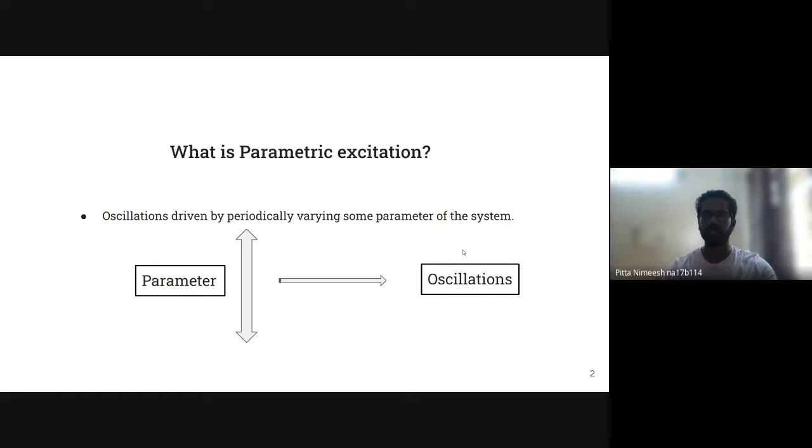So first I'll go over what parametric excitation is briefly. So parametric excitations are oscillations which are driven by periodically varying a parameter of the system. So this is a very non-intuitive kind of phenomena. So I'll give a small example to help you get an intuition.

So everyone must have played on the swings in the childhood and tried doing this without swinging, without putting your feet on the ground. And so you must have wondered how this happens. So this is basically a result of parametric excitation.

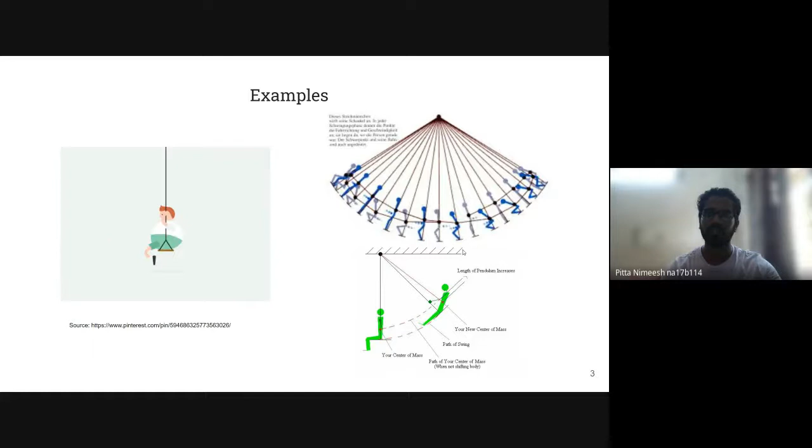So what you're doing here is changing the position of your legs and body such that the center of gravity changes, and your body acts like a pendulum, and changing the position of center of gravity changes the length of the pendulum. Now, doing this continuously produces oscillations. Yeah. So now we'll look at how this happens in ships.

So we all know that the roll natural period of a ship depends on the GM, which is given by this, and one of the parts of this is BM, which is the second area moment of water plane area divided by the underwater volume.

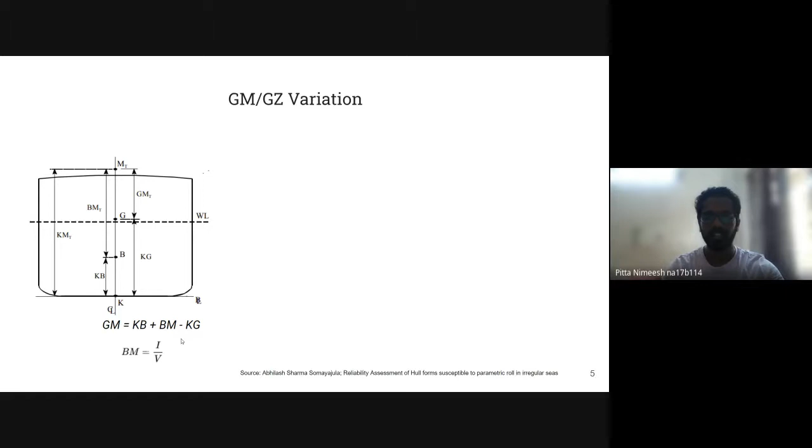Now, when there is a wave passing through the ship, due to the wave, the water plane area and the underwater area changes. Now, when the trough is at the midship, the underwater area is more, and when the crest is at midship, the underwater area is less than what it is at the calm water.

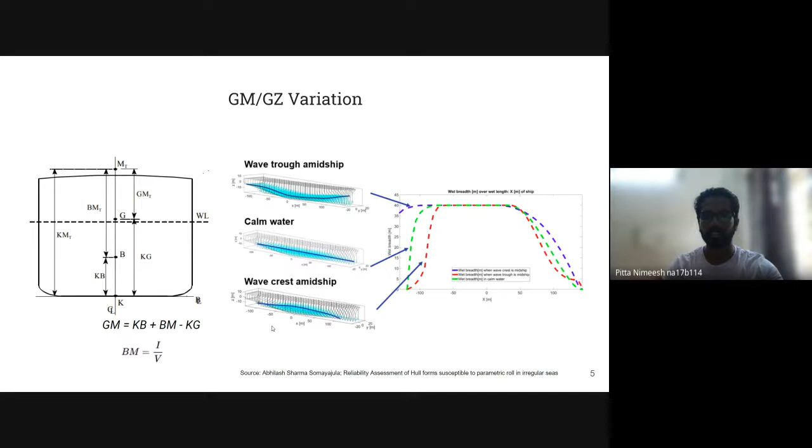Now, this variation in underwater area will cause a change in BM, and this causes a change in GM, which is a variation in our parameter of the system. So this is what causes parametric roll.

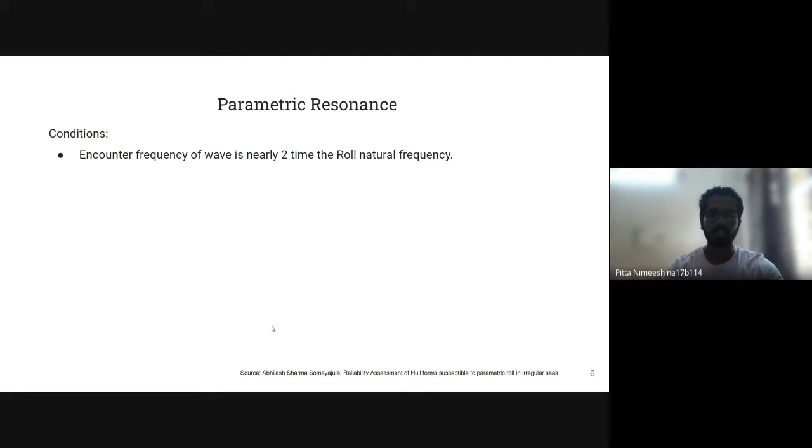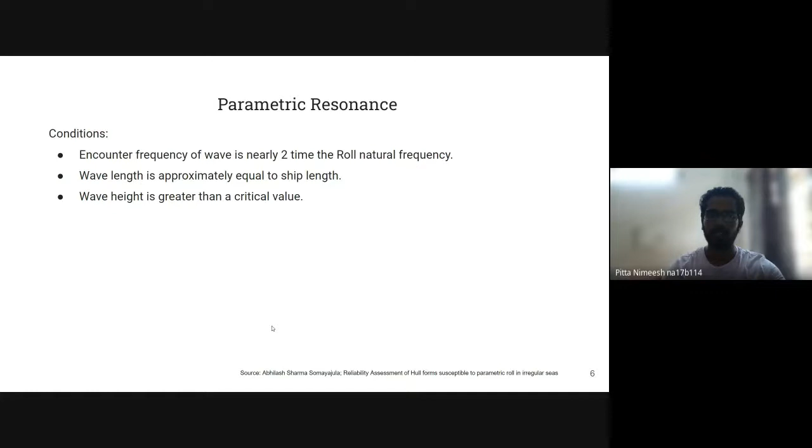Now there are certain conditions which have to be met for this to cause resonance. So these conditions are that the encounter frequency of the wave should be twice the roll natural frequency, the wavelength should be approximately equal to the ship length, and the wave height should be greater than a certain critical value. The roll damping of the hull should be less.

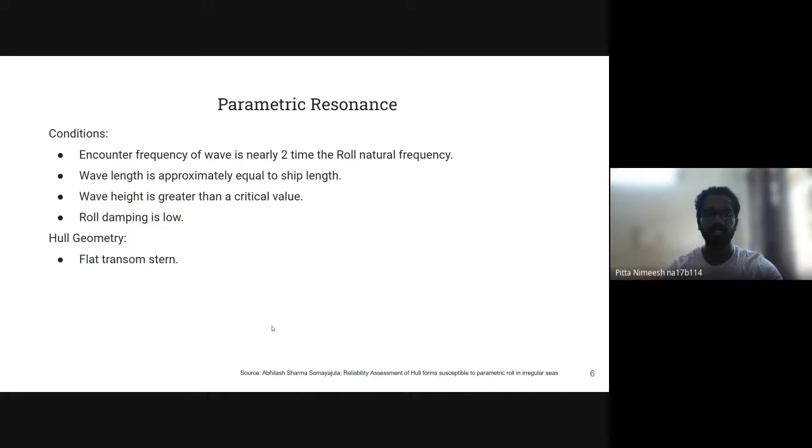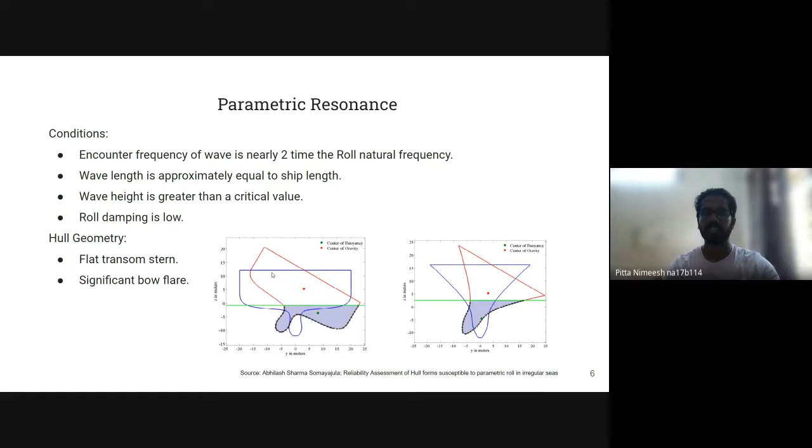So there are certain hull geometries which are more susceptible to this phenomena. So this is a flat transom stern. Here you can see that the hull form is changing very drastically, both at the aft and forward. So this is a hull form of the KCS hull, and due to this drastic change, the underwater area changes, as we've seen in the previous slide. And this is the general cause of parametric resonance in ships.

So any doubts till now? No, you go ahead. We will take the questions at the end.

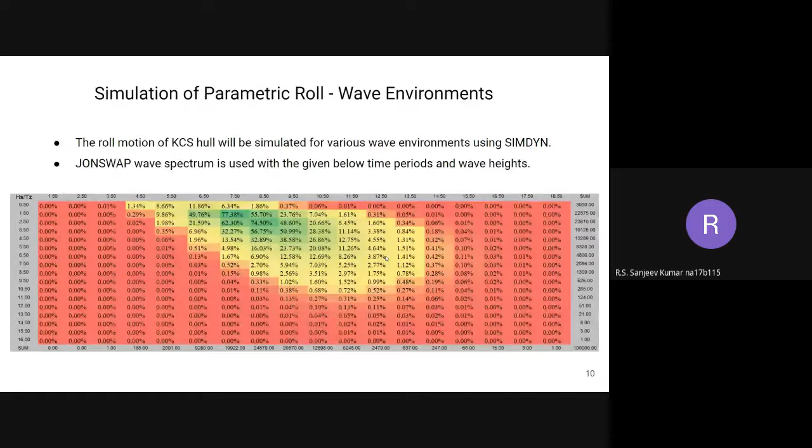I guess the more interesting question is, how did this table come about? Yes, so this is from experimental data that they gathered. So how must this have been constructed? What would be the methodology through which this table came about? So they must have gathered the wave elevation data over a large period of time, and then seen how many times a certain wave with this height and time period occurs.

Yeah. So I think the answer is simply that the corner box you see is about 100,000, maybe 1 lakh. 1 lakh waves were observed, at least, if not more. In 1 lakh waves, they were looking at height measurements of the records. Definitely more than 1 lakh waves must have been observed. And what they're trying to find out is, from each wave record you will have an irregular wave elevation.

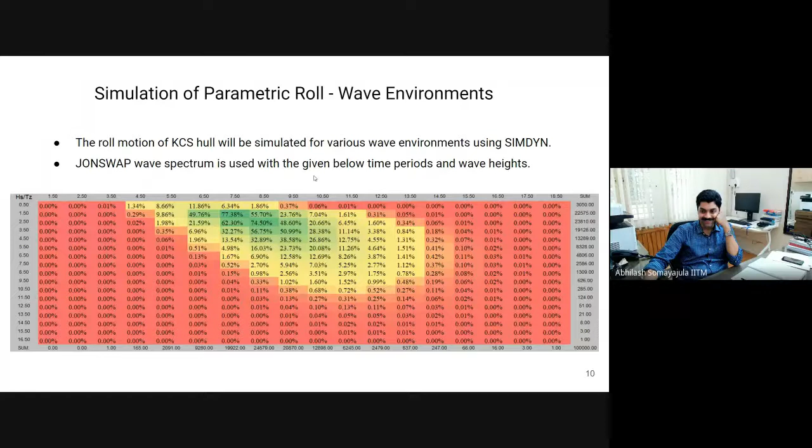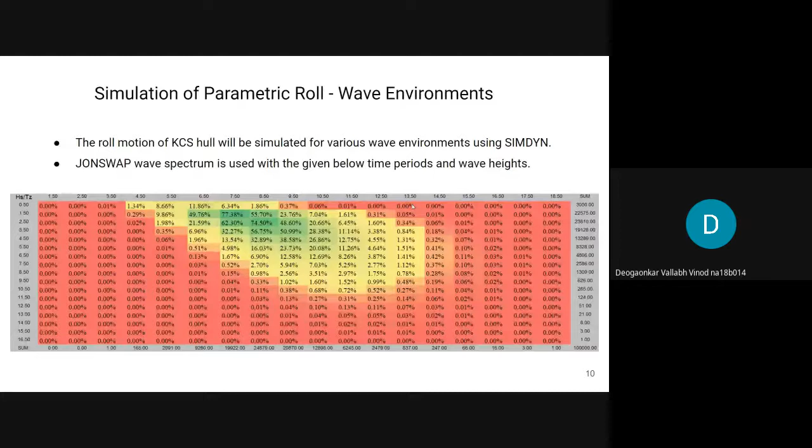Like if we have simulation, then why LSTM and all that? Okay, so basically if you simulate it, it takes a very long time. So right now there was one simulation, right? This itself took me around 1 hour approximately. So if you use an ML model, I'm hoping it will be faster, like we'll be able to get faster predictions.

I have a doubt. We have previous simulations, right? Why can't we use that to solve this problem instead, like we can use past data, this kind of simulation to predict the model outcome.

No, I didn't get you, can you come again? Like what I'm saying is, in this slide you already have this predicted data, from previous simulations. We can use this graph to predict how the ship rolls or something. Why should we go for ML?

Yeah, but this is for a certain sea state, and the probability of occurrence of the same sea state again is practically zero, right? So if the ship encounters the exact same sea, then we can say it will roll like this, but otherwise we can't say that.

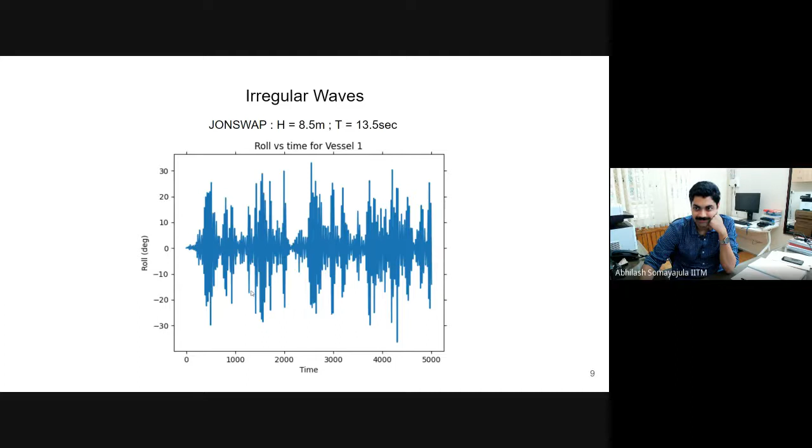Go back one more slide to the regular wave case. Right, the answer lies here. Okay, so parametric roll takes around 3 to 4 periods to develop. So if you use a window size of that length, say 3 to 4 roll natural periods, and it is able to see the data in that, then it should be able to predict after that how it happens.

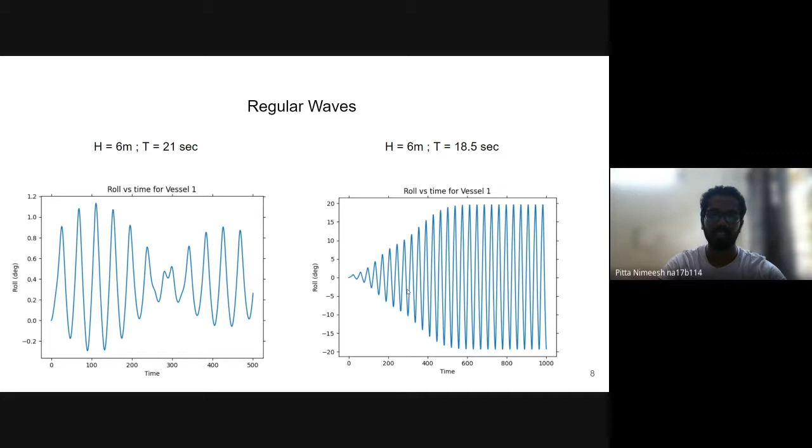So in this particular example, I see that you are at 5 degrees roll amplitude at about 200 seconds, roughly. And then 4 cycles down the line, you're at about 10 degrees amplitude, right? But if I go another 4 cycles, I'm close to maybe 15 degrees. So the increase seems to be linear here, right? Why is the increase linear?

Why is it? Because it seems that when we were discussing parametric roll, or at least when you were presenting, we had the idea that it rises exponentially. So why does it rise linearly here?

Okay, I did not observe that. Sorry? I'm not sure, sir.

So, okay, maybe I'll ask you this. What is happening at 600 seconds? It is going into a steady state. So why is it going into a steady state? What is causing it to stabilize? Why didn't it stabilize at 200 seconds?

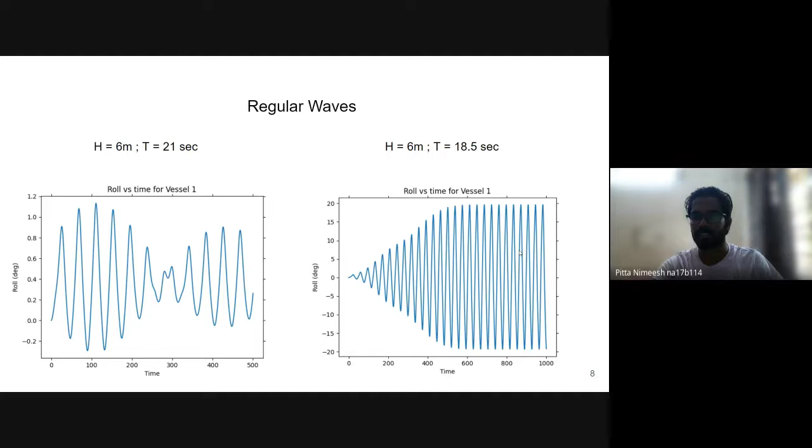Because of the roll damping. As the roll increases, the roll velocity will increase, and that will increase the quadratic damping. So that is causing it to stabilize. Correct. So it is the quadratic roll damping which is causing it to stabilize.

And the answer lies hidden that if the quadratic damping was absent, you would not see a straight line increase. You would see an exponential rise in amplitude. This is stabilizing. You are seeing that the amplitude increases from 5 degrees to 10 degrees linearly because of the presence of quadratic damping. If quadratic damping was not there, then you can try simulating and see within 4 cycles it will exponentially increase.

Maybe that is something which you can check out, Nimeesh. I think it is worth the effort to check that out, to understand the physics behind it. So in that sense, you have to look at 4 or 5 cycles and then try to predict it. But then maybe more interesting problems can come across.

Any other questions before I come up with some more questions for Nimeesh? Yeah, Krishna, will you go ahead? Why are you choosing the JONSWAP wave spectrum? Why are you not letting Mansi go? I think she's trying to switch her microphone, if I'm not wrong. Yes, sir, Krishna was speaking, so I thought he could ask a question first. No, you can go ahead. Go ahead, ask your question.

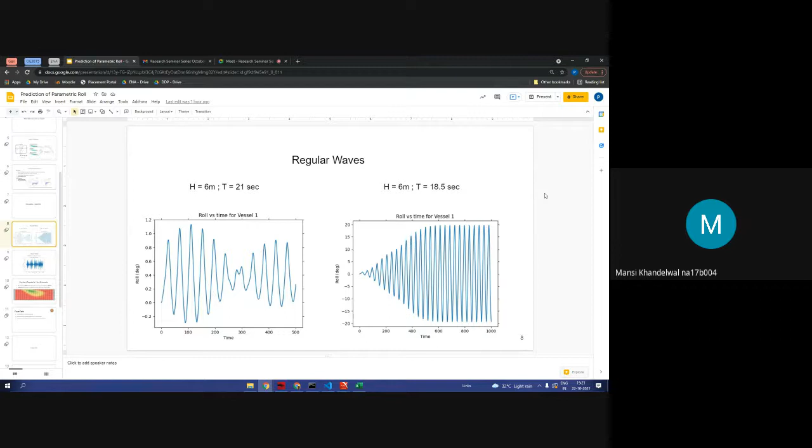Yeah, so what I was asking was that you said we can predict it for the next 15-20 seconds, what the parametric roll would be like. So I just wanted to understand, when you apply this to an actual ship, how would it translate? If you know that in the next 15-20 seconds the ship is going to have this kind of parametric roll, how does it get corrected? Because 15-20 seconds seems like a very short duration of time. Is it being applied anywhere else at the moment? So what can you do with that information, in a sense? Let's say I tell you that you're going to experience parametric roll in the next 40 seconds. Right, what can be done?

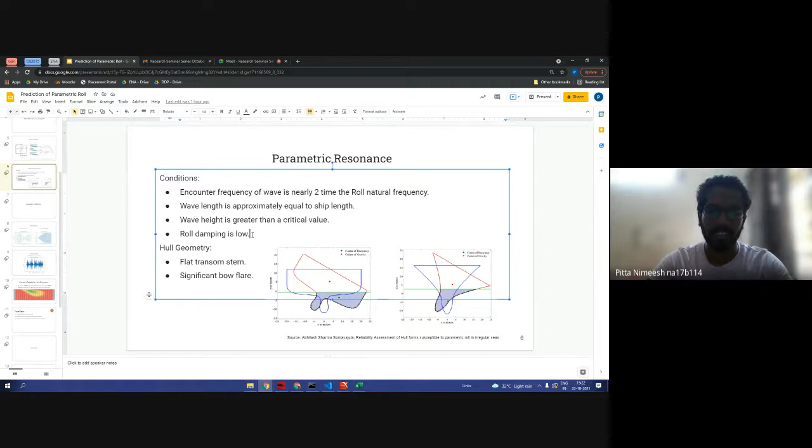So here we have seen the conditions which have to be met in order for the parametric roll to occur. So here the captain can take maneuvers such that these conditions are not met. He can either change the direction of the ship or reduce or increase the velocity of the ship. So that way he can try to avoid it. And that is, of course, provided he has enough time to make such maneuvers. So the prediction window has to be large enough that it is possible to do that.

Did that answer your question, Mansi? Yeah, it did, but in a way it did. I understood that once you know this is going to happen, you can alter any of these four conditions. But I also want to understand, is 40 seconds even enough time to change your speed or even change the direction of the ship, because we're talking about really long ships here, right? So how are people solving this at the moment? Are people applying AI or ML techniques for solving this?

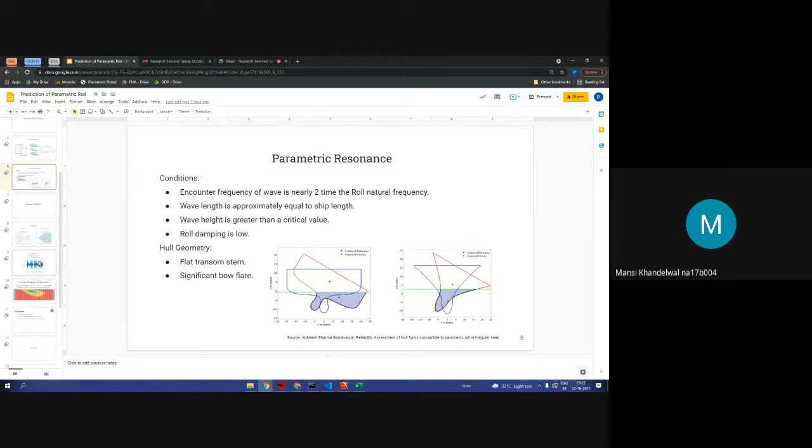Or would it be for autonomous vehicles and not for manually controlled ships? So the question is, Nimesh, how are people solving it now without the use of ML? And why would ML help?

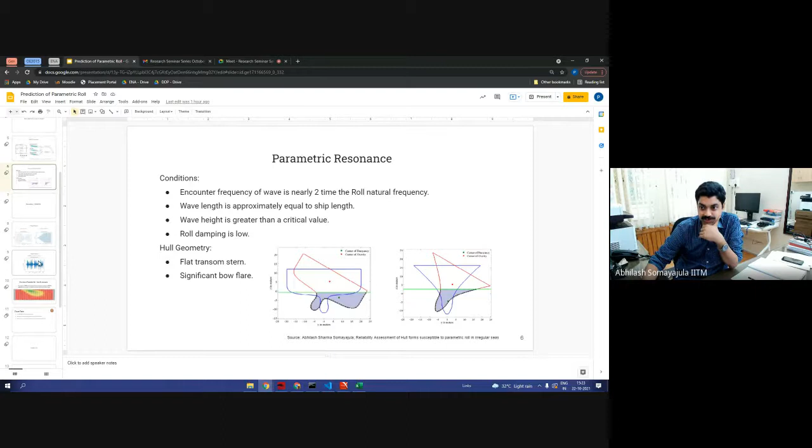Currently they are using different methods which look at the energy transfer, like the energy transfer between the heave and pitch motion into the roll motion. I haven't looked into it a lot, but their prediction window seems to be around 25 to 30 seconds, if I'm not wrong. Those are the systems currently being used in ships, but they are effective to some part, not very effective.

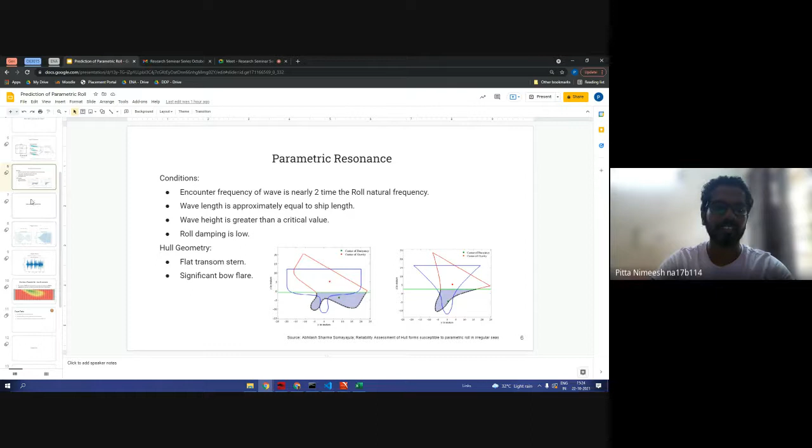Recent papers use these LSTMs and similar models. There was one paper which showed good results in regular waves, using only a multi-layer perceptron. So I was hoping I could use a better model like LSTMs and see if it performs well in irregular seas.

I think Nimesh, you want to answer the question of what happens when AI and ML were not there. There are traditional methodologies also to predict the occurrence of parametric roll. You've taken a look at one or two papers in that direction. It only goes to show that you need to spend some more time with them to get a better understanding of what the traditional approaches were, what the downside was, and why ML will be helpful.

I think I may have lost him. Nimesh, are you there? I guess he must have had a power failure, looks like it.

Okay, but I think Mansi, to answer your question, am I audible or is the network dropping on my side? Yes sir, no sir, you're out. Yes sir, you're audible. Okay, all right.

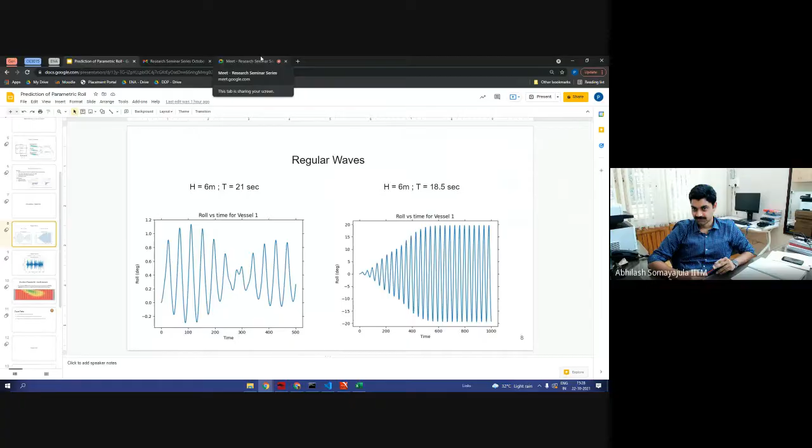Aaradhy, can you repeat your question? It's breaking.

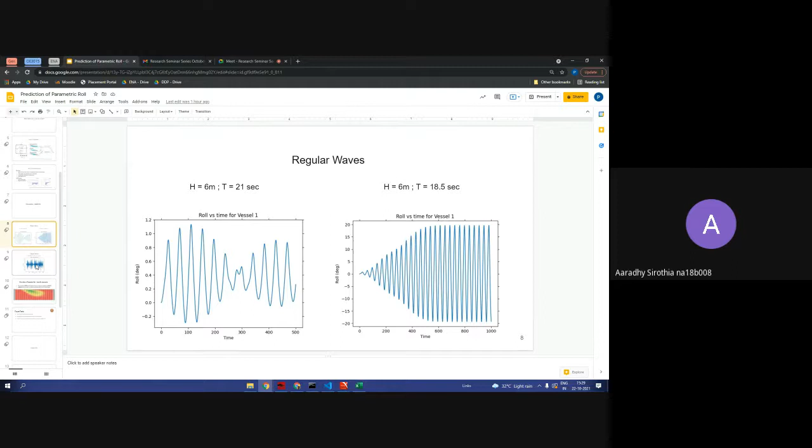I asked, all these dynamic positioning systems exist already, and their task is also to keep that given vessel in that given position, and they also encounter all these parametric rolls, even other motions. Why can't we extend their application into a ship motion thing instead of trying it from scratch?

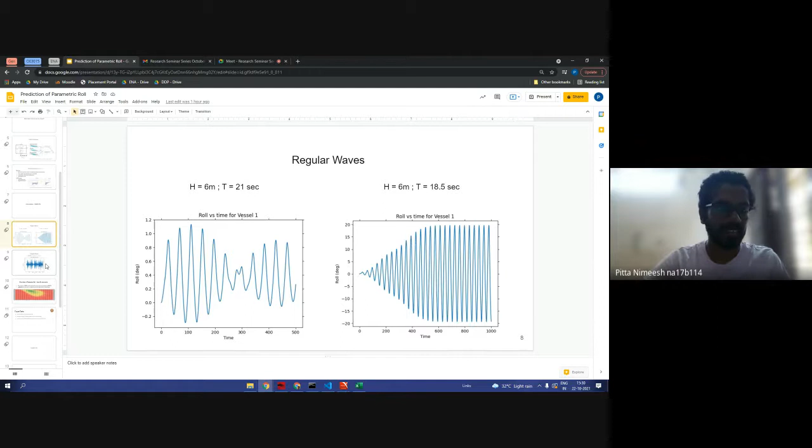So, right now I'm not looking at correcting or stabilizing it. I'm just trying to see if the parametric roll will occur. Not all ships may have those stabilizing systems, right? No, I think the answer to that is slightly different.

And I'm hearing an echo from someone. Hello. Am I audible fine now? No, I think the echo is from you, Nimesh. Yeah, okay, all right.

Okay, so I think the answer to that question, Aaradhy, is ship dynamic positioning systems usually try to position you in the horizontal modes. You want to keep it at a particular location in the XY plane, and keep its heading angle at a certain value. Typically, in ship dynamic positioning, you will not see us control the sea-keeping modes, because then we are spending too much energy of our actuators. It just does not make much sense.

We are using all of our thrust allocation to keep our sea-keeping motions down, whereas the sea-keeping motions are only vibratory or oscillatory in nature. They are not going to be positioning us away, so they don't hinder the operation as much as the drift in surge, sway, and yaw does. So most dynamic positioning systems, whether for offshore operations or any other purposes, are usually looking at controlling the horizontal plane motions.

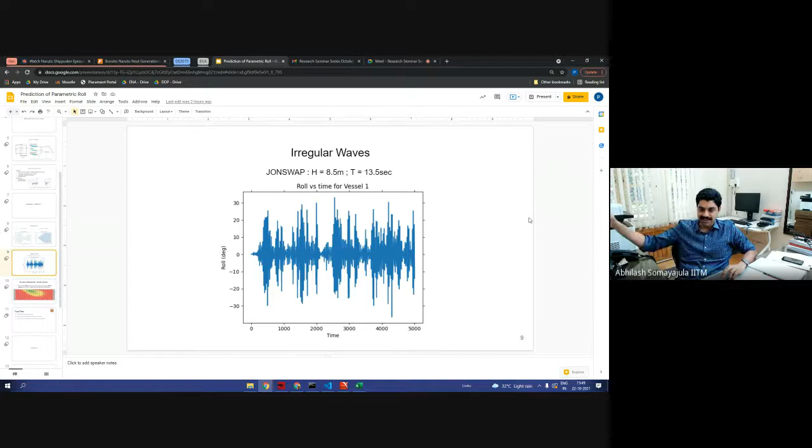And that is why when Ashwin says I will take the Fourier transform and combine those wave elevations and then perform an extraction for 10,000 seconds, what he will see is essentially a repeat of the 1,000, 10 times. Yeah, that's why I said in reality it should be random. In reality, it will be random, but it will not come out, because that finite time history that you have taken will repeat after the 1,000 second interval, even if you took the same Fourier transform and the same Fourier frequencies.

Is that sinking in for everybody? Yes, sir. I know the question is anticlimactic, but I wanted to drive home a point here, where I wanted you to think a little bit about Fourier transforms and their applicability. No, sir, I didn't understand this.

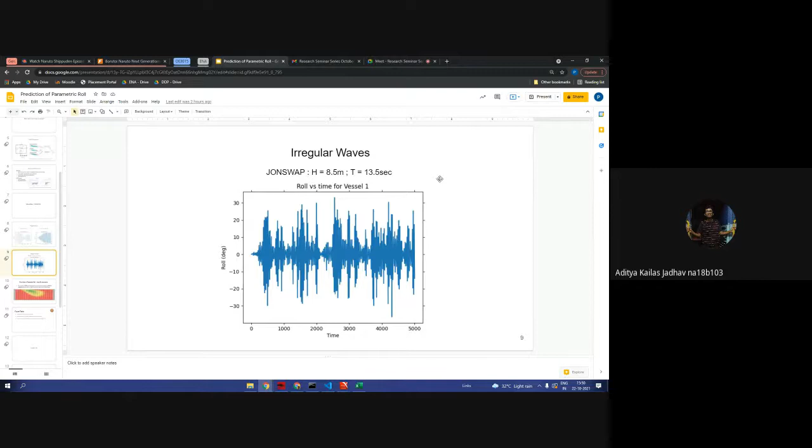See, whenever, suppose I am taking a, maybe Nimeesh, you can stop sharing. And maybe I can share my screen. Let's see if I can do this. Is my screen visible? Yes, sir.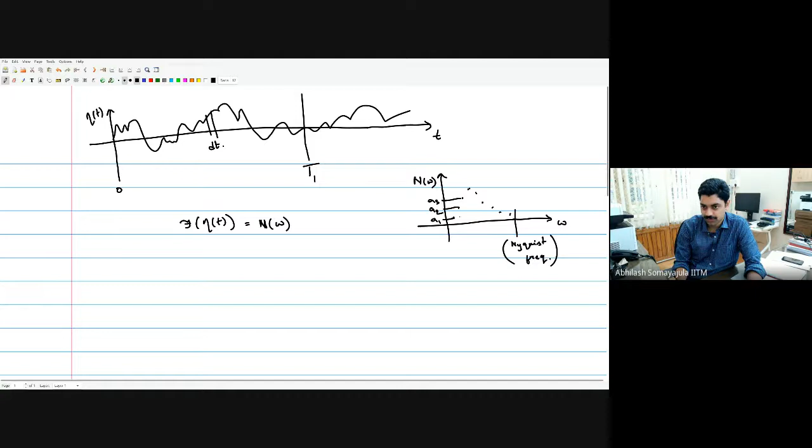So I take these individual components. Ashwin is saying that I'll take these individual amplitudes that I have read off from the n of omega using a fast Fourier transform. And I'll simply construct: this one is A1, this one is A2, and this one is A3, and so on, corresponding to frequency omega 1, omega 2, omega 3, and so on. So what he's saying, I'll simply do A1 cos omega 1t plus A2 cos omega 2t, assuming all the amplitudes are real, otherwise you'll have to do the complex stuff. I'm just taking this for simplicity, okay?

Plus A3 cos omega 3t. Otherwise you would have to do actually A1 e to the power i omega 1t plus A2 e to the power i omega 2t plus A3 e to the power i omega 3t and so on, and take the real part of that, if A1, A2 and A3 are complex, which they usually will be. So we can forget about this aspect and stick with that. Now I can simply say that eta of t is equal to this, and I can plug t equal to 0 to 10,000.

Yes? This will be correct for 0 to 1000 seconds, but from 1000 to the remaining 9000 seconds, how is it? Correct. From 0 to 1000 seconds, it will give back the exact wave elevation time history that you have here. Right? But from 1000 seconds, the signal will repeat again. It will look like this, and it'll do the same thing which it did before.

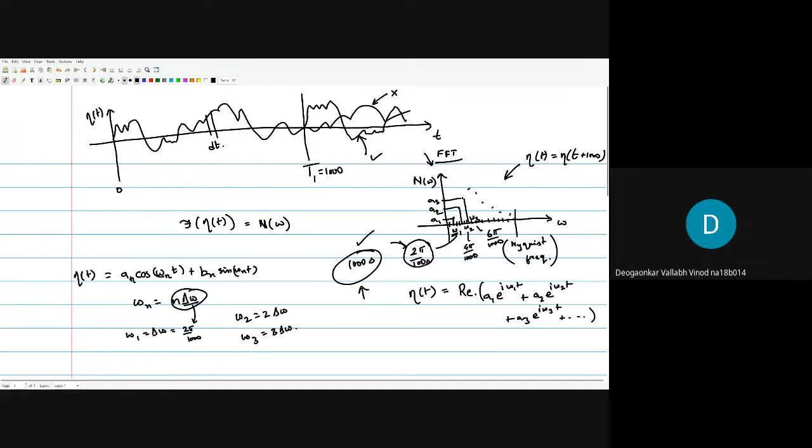So that information we actually cannot have. Correct. What I can do is I can make a prediction. See, once I get this curve, I don't want to erase that. So let's say I have this curve. I formulate a curve and I say I'll interpolate. I'll try to get these values in between. I can do that, isn't it? Yeah. But then when I take those values, I have to assign them some phase.

And when I assign them one phase, I am specifically choosing one possible outcome out of many hundreds and thousands that could possibly happen. Which means this wave elevation need not go like this. It could have gone some other way as well, and that would still be valid. So there are multiple possible ways I could come up with a new wave elevation which matches my 1000-second time history but also has an extension. But that is not known for sure. I have multiple solutions. I don't know which one it is going to follow.

Okay? Yes, sir. That is the idea I wanted to drive home with that example. I hope that made some sense. If not, I am really hopeful you will ask me and tell me that you did not understand. Yes, everybody with me? Yes, sir.